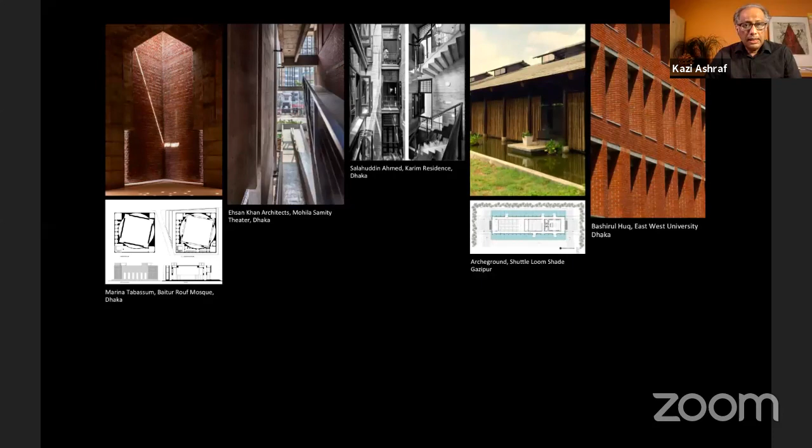With Mazhar Islam, it relates to a more fundamental story about the bungalow, an architectural idea that emerged from the Bengal region, which was adopted by the English, and became, as we all know, a global paradigm of dwelling. But I'm not talking about the bungalow per se - what I want to think about is how that simple rural hut generated a techno-utilitarian aspect in architecture, which subsequently informed what is known as tropical architecture.

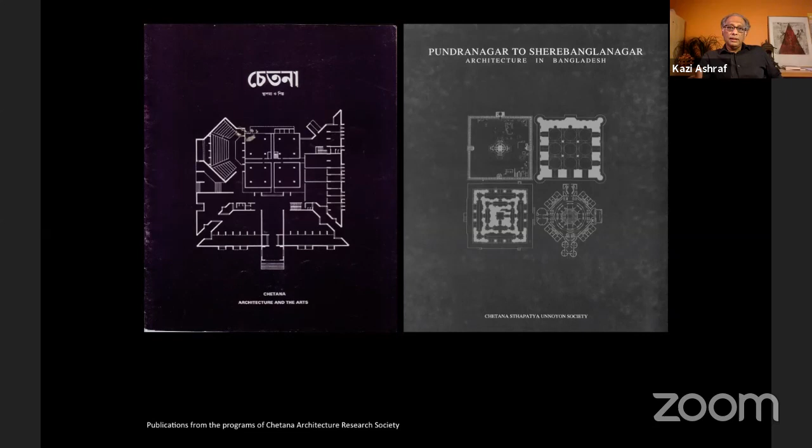This image is historically important. You can see that Chetana organized a major symposium or seminar on architecture, design and education in 1987, and Doshi was invited, Anand Raje, Satish Gujral, and a few other people to Dhaka - the first time they visited Dhaka. But what it did was inaugurate a new relationship between Bangladesh and India, at least. And then architects from Pakistan, Kamil Khan Mumtaz and others, also joined. So this is what I meant by the historical moment of a major discourse among South Asian architects, which went on for quite a few years, and developed into a number of other localized activities in different cities of India and Bangladesh.

But I think it didn't go on to do something very formal. Still, I think the relationships among many of the architects who are still around remain active.

Okay, and then coming back to Louis Kahn - the work is very well known, of course, to all of you, and I'm not going to go into details. I have written about this project in many places. What I want to highlight again is a few important things. Kahn's work in Dhaka played a key role in the evolution of modernism towards what I would call humanistic dimensions. His engagement with the taboo topics of modernism, which in mainstream modernism weren't discussed in a foregrounded way - one is landscape and geography, and second, spirituality and sacrality.

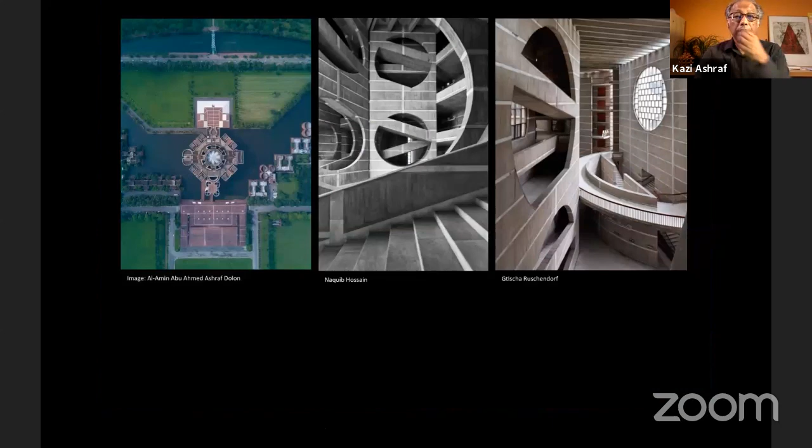Okay. And coming back to what I had mentioned earlier, the aspect of Mazharul Islam's ecological ethic, I would like to explore that a little bit.

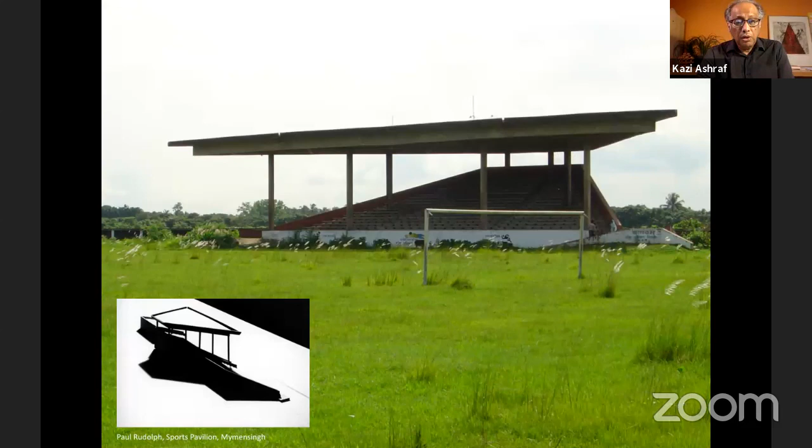Mazharul Islam was very much responsible, and he engineered or orchestrated inviting Louis Kahn, Paul Rudolph, and Stanley Tigerman to work in Bangladesh. But beyond these three figures, there were other architects, Constantinos Doxiadis and Bob Boughey, who worked in Bangladesh in the 60s.

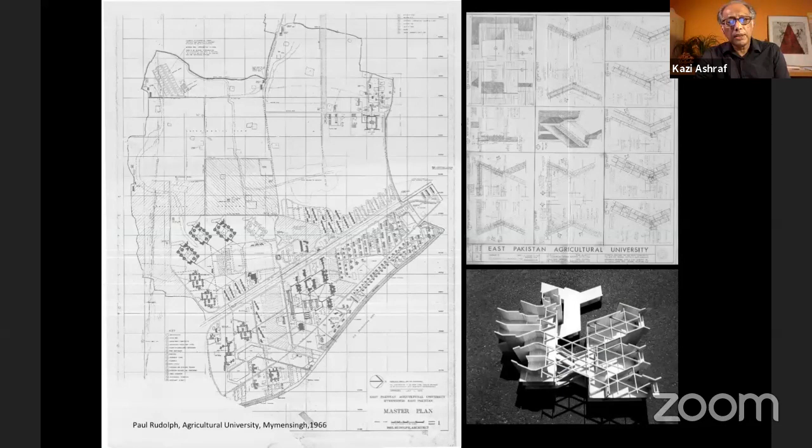Coming to a time closer to us, 90s onwards, these are examples from two architects of perhaps two generations: Bashirul Haq on the upper two frames, and Salahuddin Ahmed, who's going to be speaking soon, on the lower frames. Both explore the pavilion paradigm in residential structures, the upper one in a rural context and the lower one in an urban context.

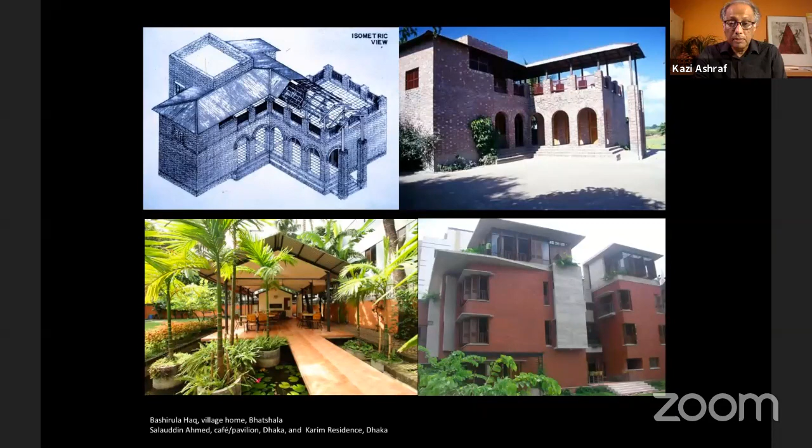Now, back to Mazharul Islam and the design of five polytechnic institutes in different locations in Bangladesh, again in the late 60s, something he did with the American architect Stanley Tigerman. I'm not going into the details of these projects, but if you look at the right, the five sites and the arrangement of the different buildings, the typological buildings and their arrangement, show different kinds of modulations.

What I've been interested in is how the pavilion paradigm becomes a condition for complex arrangement, the large-scale ensemble of things. Maybe in this case it's much more in an open site and area, but then of course you get into tighter urban situations - that's another challenge. But complexes...

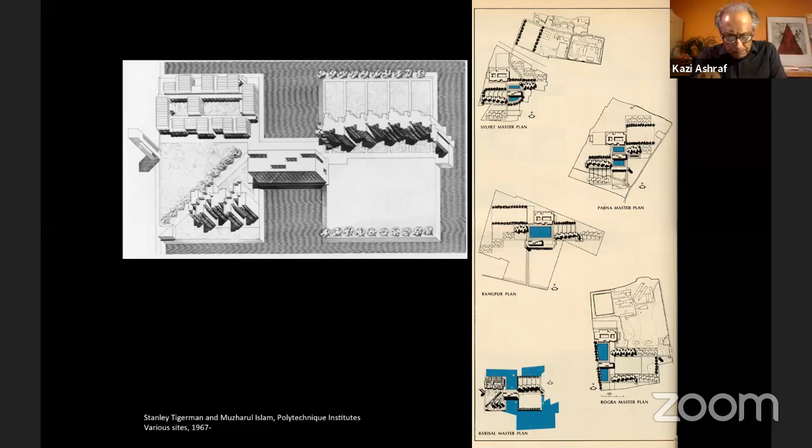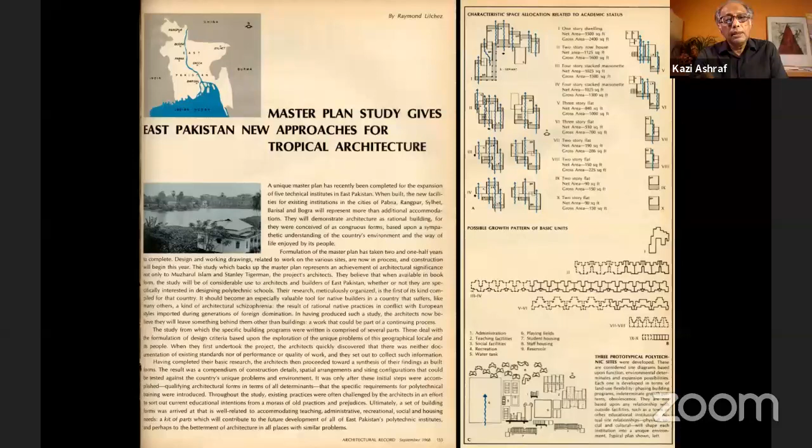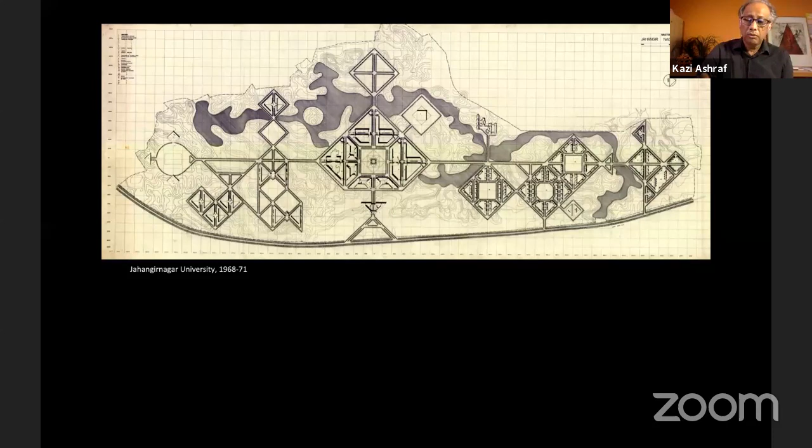The Polytechnic Institute spawned a major study for Tigerman and Mazharul Islam, and then Mazharul Islam's later work in a university outside Dhaka, Jahangirnagar University. So there are different essays on what I've mentioned as complexes, and this is much more recent. But I want to say something about the design of complexes - I find this a new area of investigation.

We find many examples of the design of complexes, but theoretically I don't know if we've looked into this very closely, other than maybe referring to what Charles Correa said: what you need in the climatic situation of India is disaggregation of forms instead of one monolithic form, as mainstream modernism would have taught us in the 40s and 50s. What you need is to splinter them off.

The best example I can think of is the Crafts Museum in Delhi - moving from the monolithic singular form to the assembly or ensemble. Correa himself gives a beautiful climatic rationale for it, a place in the shade, because you're then moving from one to the other, from various kinds of enclosed, semi-enclosed, open to totally open spaces. And that's all a very beautiful experience.

Now these clusters - from complex, you can call them clusters of pavilions - can be formed by lining them up, creating a series, or grouping them around different kinds of interiorized or semi-interiorized spaces. In rural areas of the Bengal Delta, this can be the disposition of buildings in a fabric of paddy fields, gardens, orchards, lakes, and ponds. Perhaps this is what Saif Haq and Jalal Ahmed tried to achieve in the 1980s.

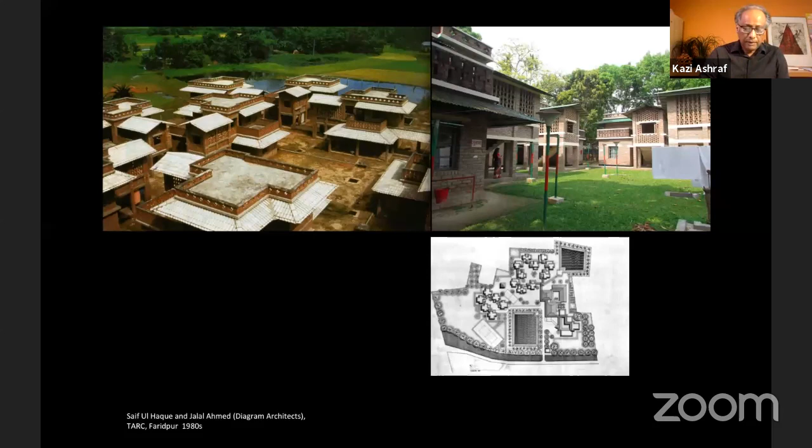But what is also important is the deliberately subdued nature of the architectural elements. This whole modulation of form, materials, light and shadow, in his work gives a sense of what I would call a belongingness, a feeling of having been there. With that on complexes - there are other architects too, like Kashef Mahboob Chowdhury, whose recent work, Friendship Hospital, is again in a very rural fabric.

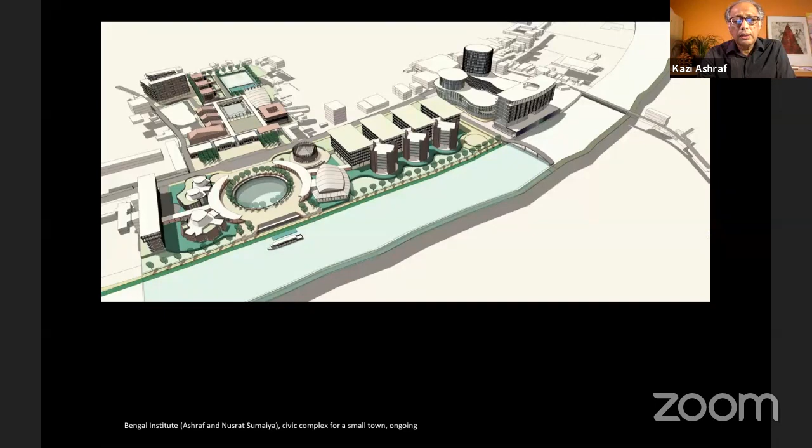And this is one of our own work, which is ongoing, a civic complex for a small town along a river.

So which brings me to the second part of the discussion: what are the challenges for being an architect in Bangladesh? I would say three: to deal with water, to deal with the life world, and to deal with the city. Architects have been active, doing powerful works, getting highlighted, and all for good reasons, but the bottom line is these three topics: water, life world, and the city.

If architects in Bangladesh were to take on a distinctive challenge, it will be around the hydrogeographic theme that I mentioned, because this theme is also very deeply connected to the future forms and cities and settlements in Bangladesh. So you have water on the one hand and the future forms and cities and settlements on the other.

I bring up again two sketches of Louis Kahn, very interesting. One on the left is the first sketch Kahn did when he came to Dhaka in 1963. He was taken on a boat ride and he also drew the riverbanks and boats on the envelope of the invitation for that, as you can see on the left, 1963.

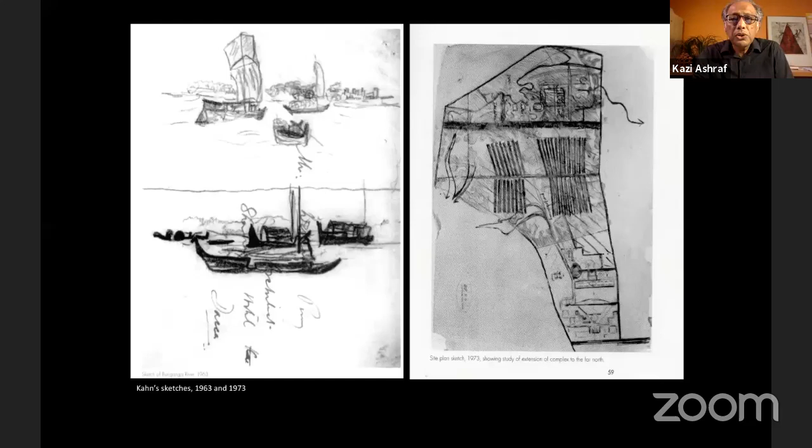Kahn did not work out his ideas systematically, but I would like to think that what he was already saying is that architecture needs to be conditioned by the physics of the delta, the mutuality of land and water, the malleability of the ground, and the preciousness of dwelling on that kind of landscape. What I would like to show are a few things that we have done ourselves.

Bangladesh is a small country, but geographically, with such fluctuations of land and water, you do get a whole array of landscape situations - some stable, some not so stable, meaning that those formations may not exist for a long time. But it is within that context that architecture has to evolve.

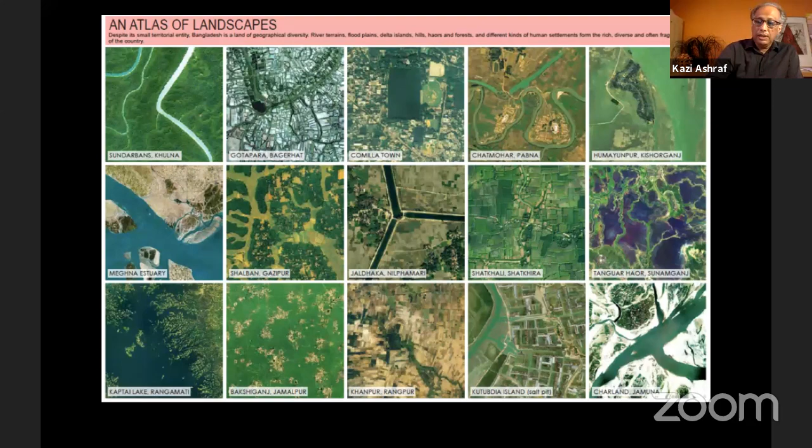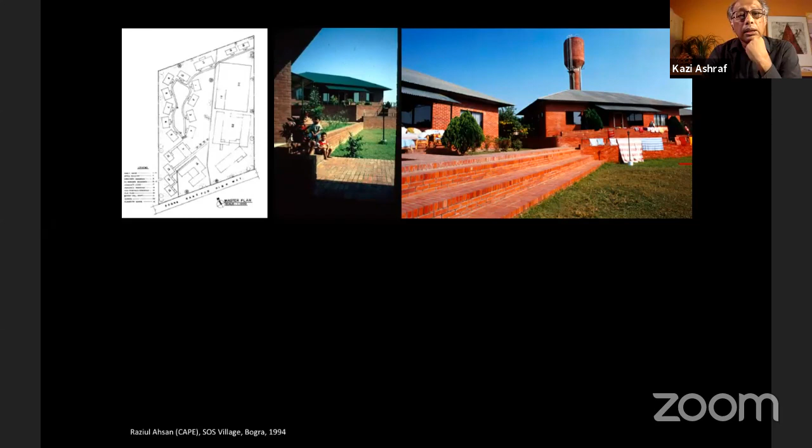So I show some work which may refer to this condition of the flux of water, either directly, or Raziul Ahsan's work, where simple landscape modulation allowed a rich experience in his project, really an ensemble of very simple buildings. Or again, in the case of Kashef Mahboob Chowdhury's well-known project, a matted building complex organized by creating a new embankment around it, which allowed a new landscape form to emerge.

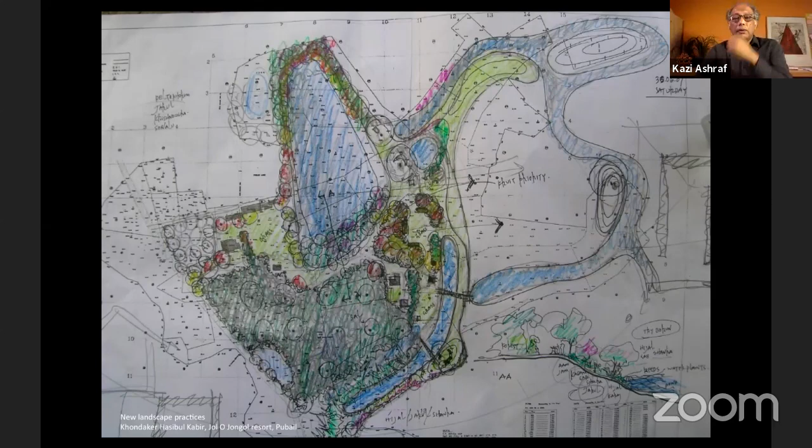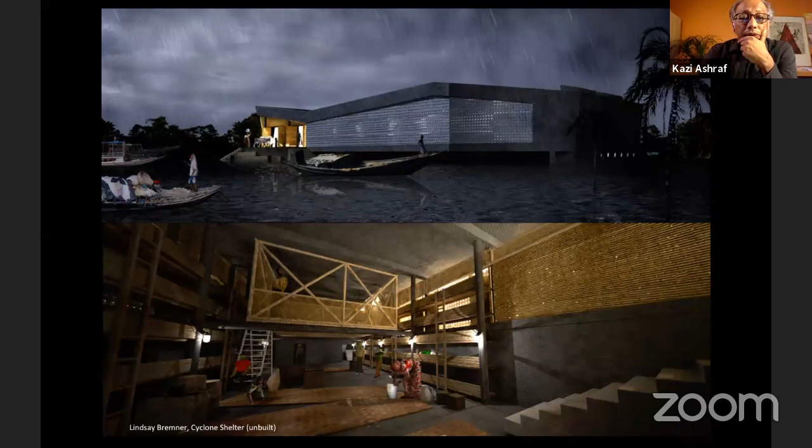And then, of course, cyclone shelters and things like that—this is an unbuilt structure, but it allows for new ways of thinking about it. Yes, let us also not forget the harshness of the conditions.

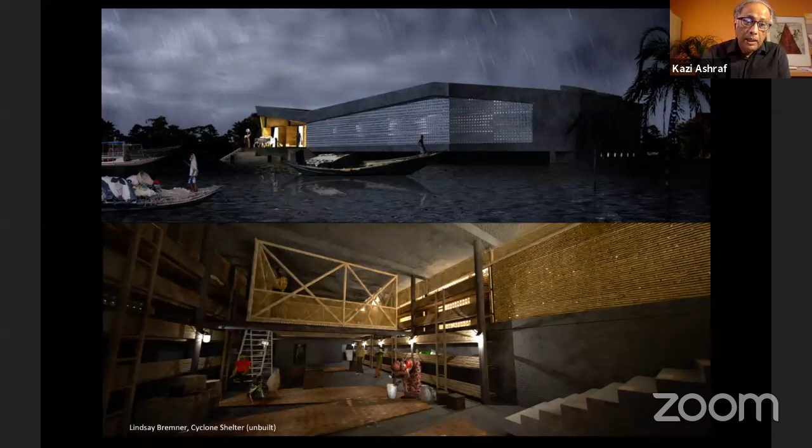So what Saif proposed was a literally floating, but fixed, bamboo structure—very fragile, but it works. It has been working as a school for little children in that area.

When you come to think about floating, of course there are floating schools, and now there are floating hospitals and all that. That becomes obvious, and people have been doing that on their own. But architects like Mohammad Rezwan have a whole social scheme for training students, little children, and older folks on boats. So if you cannot come to school, the school will go to you.

Well, that makes me think that in Bengal, or in such a hydrological milieu, boats are buildings. Look at that image. In fact, historically, in traditional contexts, the techniques people used for making boats were also techniques for building—there was a co-option of one by the other. But we have forgotten that.

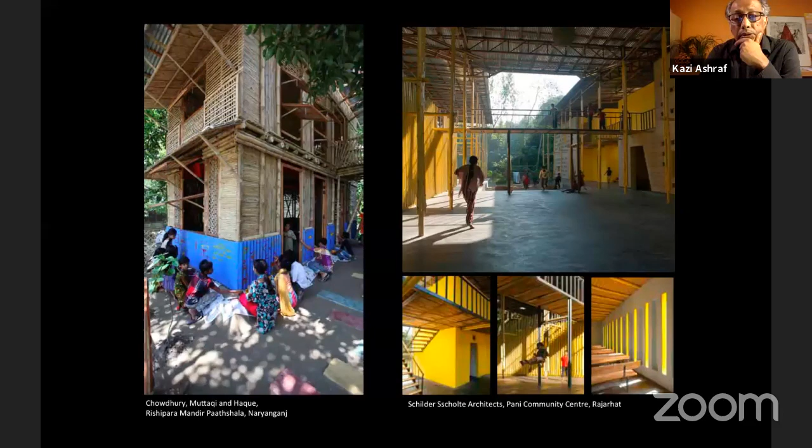Another example from Kabir's housing is a process, definitely for Kabir more important than the form itself, because the form can be decided upon and generated by the builders. And then, as I was mentioning, younger architects on the left, and maybe other non-Bangladeshi architects, working in the rural context.

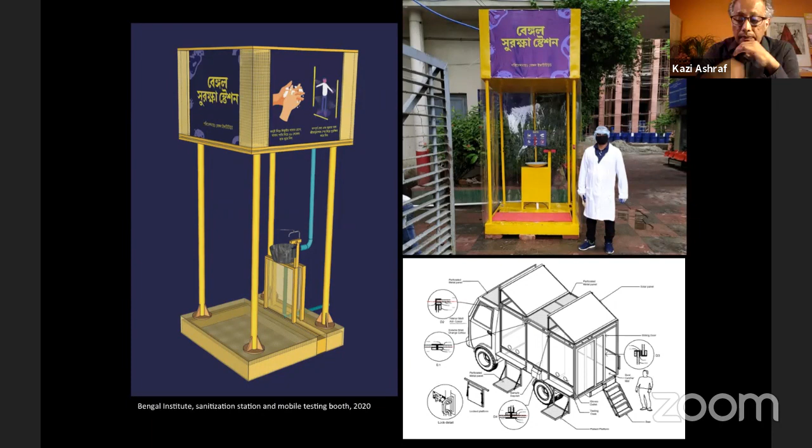At that level, the everyday, there are again moments where architects have to get involved in things not of that metropolitan, stunning nature, but this requires working with the community. We did a couple of projects, a sanitizing station at this time—you can see on the left—and a testing booth for COVID cases. These are things many architects in Bangladesh are involved in.

And lastly, last section—if you want to talk about Bangladesh, how not talk about Dhaka. No narrative is complete without that. Dhaka, the poster child of urban anarchy, name it and you have it. But yet, out of this anarchic situation, you can make something out of it.

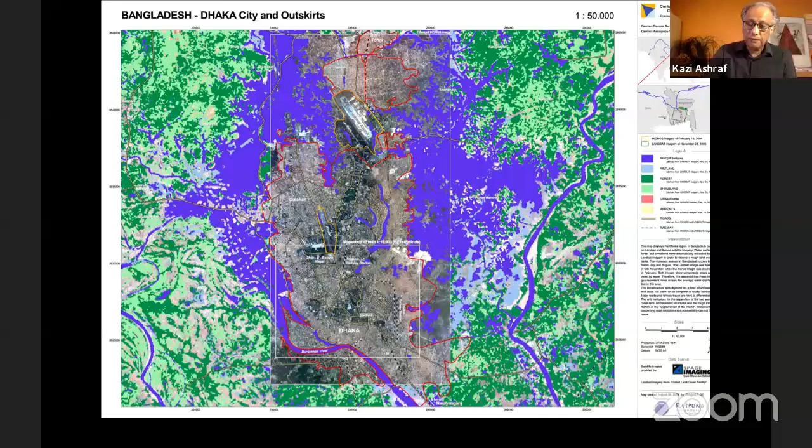A deltaic geography is an immense force of nature, where floods and flows and overflows impart to this landscape this corrugation of flat plains, ponds, muddy enclaves, and lowlands, which has constituted a topography of habitation and the occupation of that landscape. In that situation, landforms arise in an annual rhythm of unexpected waters, which has then defined the condition of what is wet and dry.

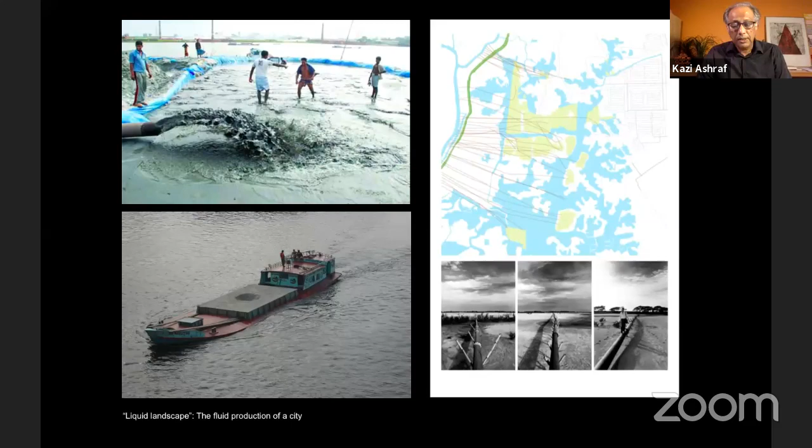How Dhaka has been produced now: massive landfill in which, very interestingly, these long pipes, as you can see on the top, and a map of the pipes on the right, across the wetlands, which is then filled up, often by these little barges carrying sand. If you look around Dhaka, if you ever go on the riverbanks, you will see these little notorious sand barges moving around. So Dhaka is being built from the fluid fabric of its surrounds, and yet wants to deny that. I'll overcome this, bypass this.

So what I'll show now quickly are images of what we at Bengal Institute are trying to do, and that's been our focus. On the one hand, we are focused on the question of the complex, the large ensemble, and also on the other hand, the question of the large scale. By the large scale, I mean the city, the town, the landscape, the region.

And quickly, what I will show, without going into too much detail, we are reimagining the riverbanks of Dhaka, as in this project from 2020. Close view. This condition does not exist, but this can happen.

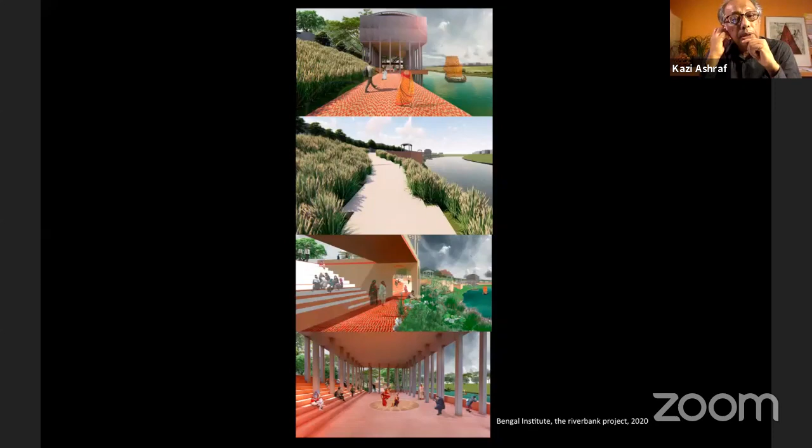And also, we're doing some riverbank projects. Again, trying to imagine a condition like this, but also this involves the fluctuation of water, which we're not showing here, but it does involve that. And the other thing is working with such fluctuating conditions as wetlands or floodplains.

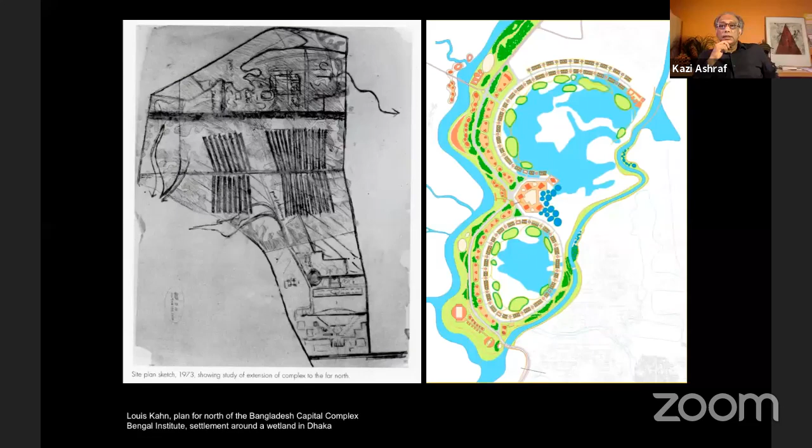So instead of pushing water away, again, Louis Kahn's sketch becomes a point of departure for us. And so what you see on the right is a wetland. Instead of filling up the wetlands and creating this sort of absurd plot-based developments and then pushing the water away—water can be pushed away, but it will return in one form or another—we are trying to develop this sort of bank or belt of housing around the wetlands.

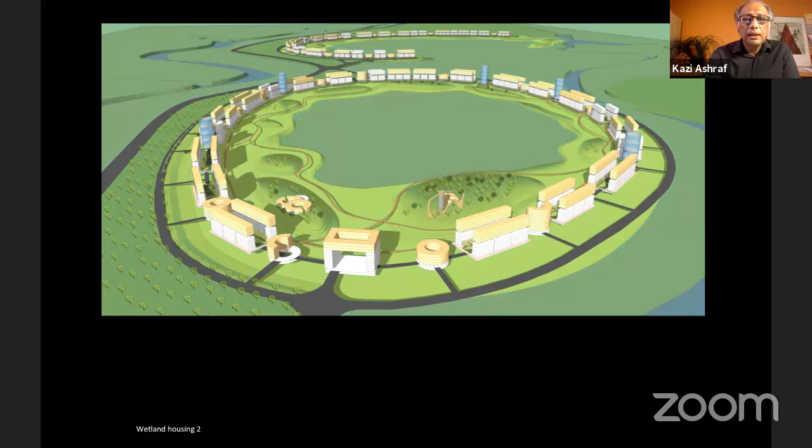This is one example, and we have multiple examples that we're working with, and this is another one. This is supposed to be a little animated, right? It is. Wetland housing. Now, this is very schematic, but I'm taking this opportunity to share with you. This is what we're doing at the Bengal Institute.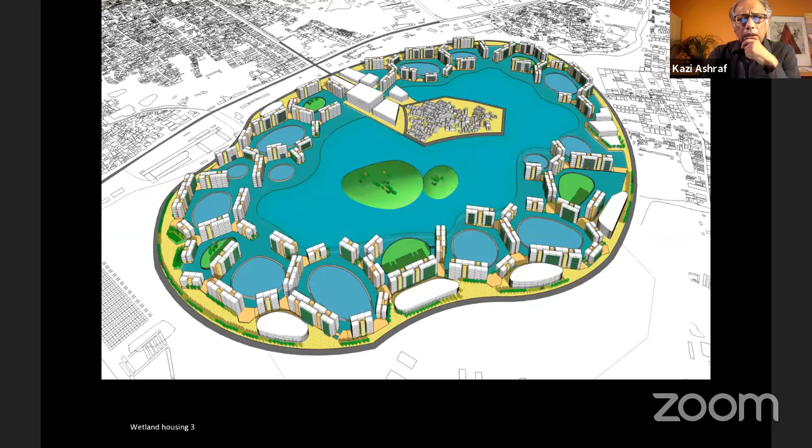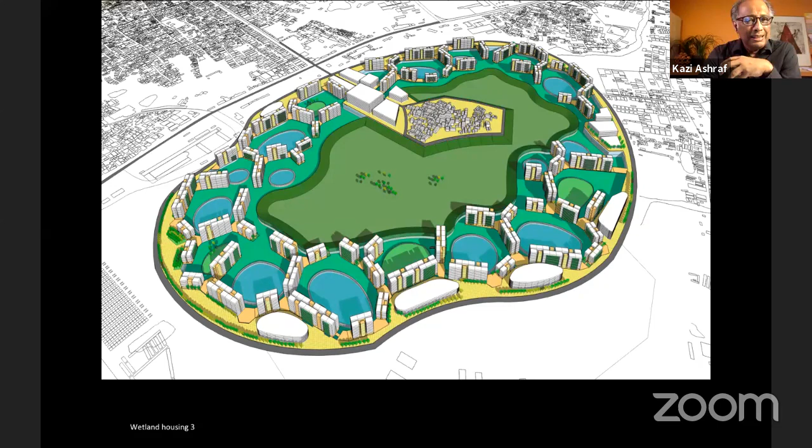Another wetland type. Again, how to resolve this conflict that has arisen between policies that require wetlands to be retained, but then economic pressure, which pushes, bypasses those policies, and destroys these wetlands to create housing.

Another model we're thinking of is agricultural settlement, which involves retaining the farmlands, but then there are roads, maybe existing roads, and how to actually develop housing on the roads. It's an idea, but something else can come out of it. Again, the preciousness of land, how to retain that.

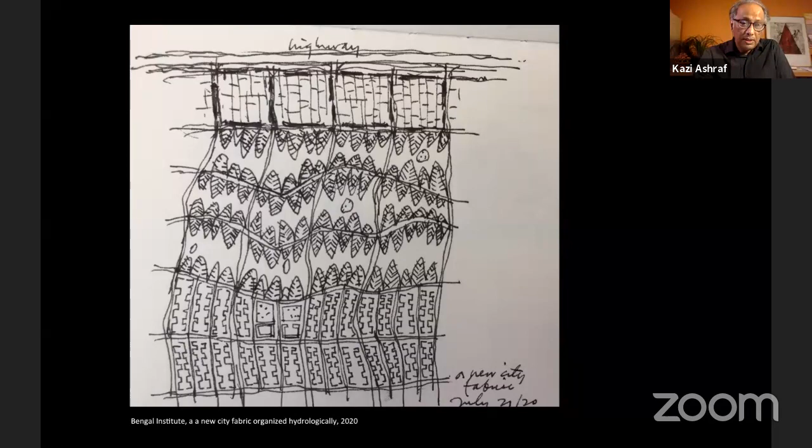Okay, and then lastly, working out of these various types that we're developing, we're thinking of a new city fabric that can happen. For Dhaka, I've argued that the core issue of Dhaka is not at the center, but at the edge. So the edge is the center of Dhaka, where all this, the politics of development, is taking place. And this is another schematic idea of perhaps something that can happen as a city fabric.

And the ecology is largely a hydrological ecology. So with its aquatic and geological formation and flux, and the projected consequences of environmental changes, the organization of land, water, and settlements takes on an urgency that is unique to Bangladesh. Settlement patterns, architectural types, and socio-economic life worlds are all dynamically interconnected, and that confronts a new accelerated economy and what have you—that's the challenge. And this is what we do at Bengal Institute.

We think that the architectural agenda needs to expand beyond form creation. The architectural task should extend its sights to the intellectual, ethical, and creative issues facing the futures of human habitats. The question of systematic and integrated landscapes, whether as habitats or place forms, agricultural fabrics, floodplains, or natural wetlands, should be at the center of new investigations and new imaginations, and actually form the core of a new design intelligence.